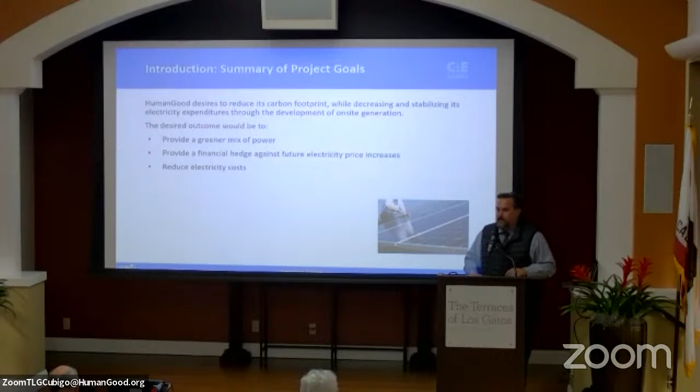So why did we do it? Very similar to what I said. We want to have a greener mix of our power. We want to create a financial hedge. So you read the newspaper, energy costs are going up constantly, right? PG&E, our local utility here, we are going to have a 23% increase in electricity next month. 23%. And it continues to go and it continues to go. So as we work with our clients and we talk about how do we reduce our costs, the only way to reduce your costs at this point is to build on-site energy and create your own, right? And even that, which we'll talk about in a little bit, they're trying to make that more difficult for us as well, right? And ultimately reduce electric costs.

I know that I'm going to talk a lot about money. We're going to talk a lot about technical stuff, but I don't want to lose sight of the environmental attributes that we get from the solar system. This is just the system going here. This is the equivalent of taking 214 cars off the road, right? And we're going to save money and they look cool, right? So I love the fact that we do this. I use this one when I talk at schools. It's 120 million cell phones charged. So you figure at a local high school, that's about 1 month's worth of their students charging their cell phones. It's crazy.

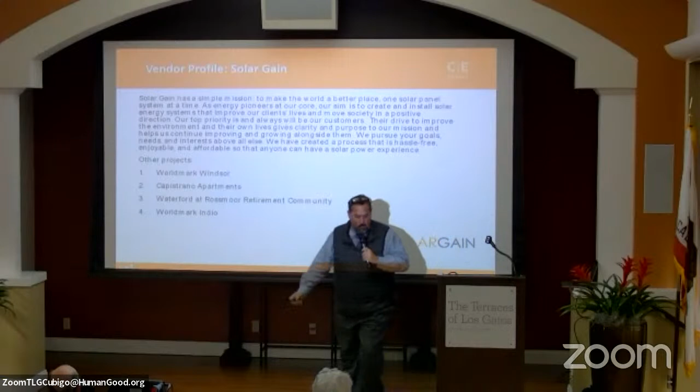I can't stand sitting behind one of these, so I'm going to move around. So how many of you have actually gotten to interact with any of the folks that are here working on site? Are they nice? Yeah. And this is just the initial crew, right? Just wait till they start banging on your roofs and waking you up at 5 o'clock in the morning because they want to get started working. Bradley didn't tell you that we approved 5 a.m. starts. Oh, sorry. Sorry, Bradley.

So, Solar Gain is a company that we've done business with for a long time. This project for Human Good was actually so big, I had to bring in 3 contractors to do it. So Solar Gain is doing the facility here. They're doing the facility in Los Altos.

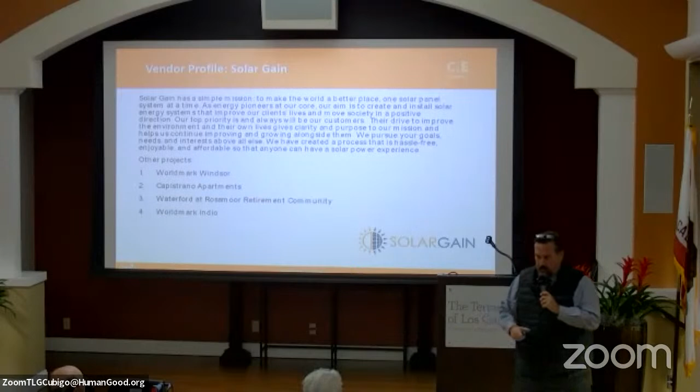They're doing a facility in Bakersfield for us. They're doing a facility in Fresno for us. And they are doing a facility in Oakland for us, right? So these guys have done a lot of projects for us. This is kind of one of the values of bringing us in to manage the process, is that we bring vendors in that we already know, right? We're not the vendor. We're the middle person where we help you guys figure that one out.

But these are some projects that they've done. So they did some work at Rossmoor. They did the Worldmark Windsor, which is a timeshare place up in Windsor, actually, go figure. So if you want to read their profile, this is for information about them.

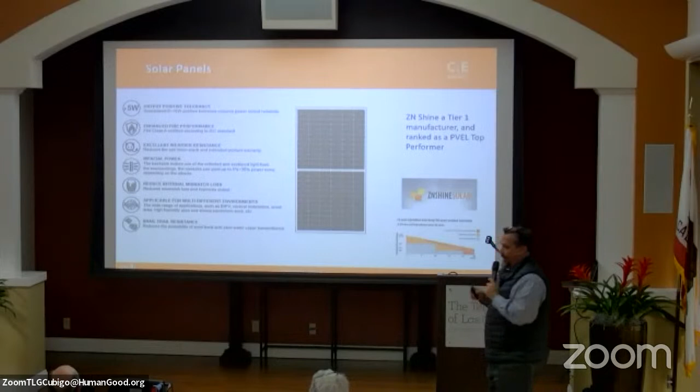I know you guys are all super, super interested in what solar panels we chose to put on the roof. So I will tell you guys a secret. In California, solar panels are relatively similar to the gasoline we get. The gasoline we get is already at such a high standard that even Rotten Robbie's gas is better than gas anywhere else in the country, right? Same thing with solar panels here. So we only use tier 1 solar panels.

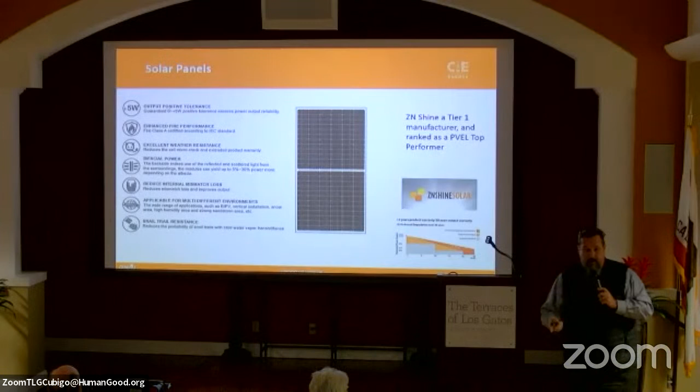In this instance, they used a panel called ZN Shine panel. It is a tier 1 panel, which is the highest grade panel you can have. One nice advantage of the ZN Shine panel is there's actually a 30-year warranty on these versus a 25-year warranty. Yes, ma'am. These particular panels, I believe, are made in Malaysia. Malaysia.

Yeah, so the push to American-made panels only happened literally a year ago yesterday, when the federal government decided to invest billions and billions of dollars to bring that back into the country. None of those are up and running yet, but yeah. But good question, where are they made?

So these are the panels going up. They're actually something called bifacial panels. So not only will we get the solar power that's coming in from the top, but these panels can actually pick up a little bit of the power that's reflecting from underneath. So as the irradiance bounces, it bounces back up and it gets it. It's a really cool selling feature for the guys who do that. And it literally increases our yield by like 3%. But it's really cool because we get power from the back as well. Yes, sir.

That's a great question. So I'll just repeat the question. So the question is, can you tell us a little bit about the reliability of the panel, time to failure? So I talked about a 30-year warranty. So let me tell you what that is, because it's actually a reliability warranty.

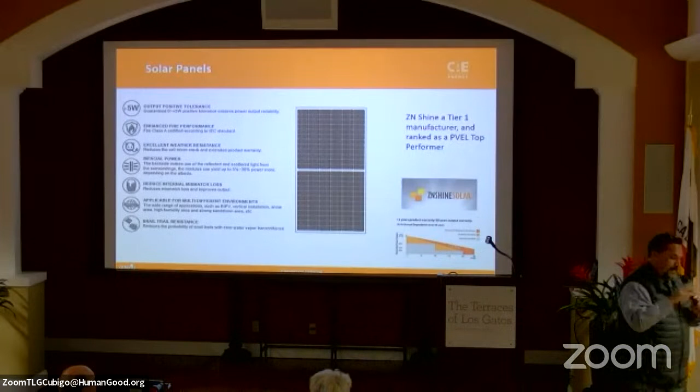So these panels are guaranteed to degrade no more than 0.5% per year. That means that at the end of the 30-year warranty, it doesn't actually equal out exactly to 15% because it's a half of the previous year. We're guaranteed to get about 90% of the production in year 30 that we're getting in year 1. Yeah, panels have gotten pretty amazing. The panels that are on my roof, I think that was like a 15-year warranty, right?

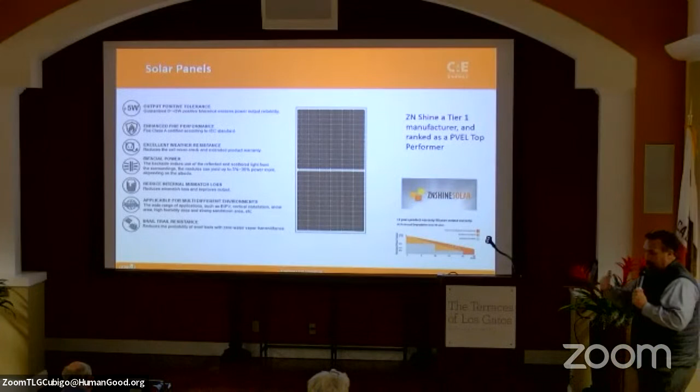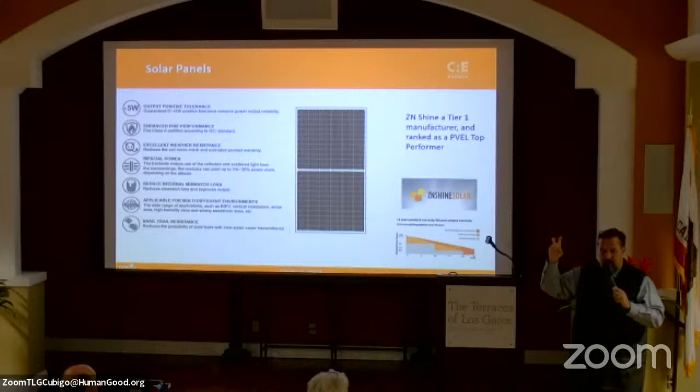They've also gotten incredibly more dense. So imagine one of these panels is about the size of a piece of plywood, right? So that's 4 feet by 8 feet. 10 years ago, when I put solar on my roof, I got 200 watt panels. So there's 200 watts per sheet of plywood. This is 540 watts per sheet of plywood. It's crazy how much more dense they've got. Any more questions about the panels themselves? About 4 feet by 8 feet.

Yes, ma'am. The question is, how do you clean them? So once every 6 months for arts and crafts, we are all going to go up on the roof.

So it's a good question. The panels actually very much need to be cleaned. So part of the arrangement that corporate has done is that once a year, we're going to have somebody come out, check all of the connections, make sure everything is still running properly. And twice a year, they're going to be cleaned. Yeah, it's actually amazing how much of an impact that makes when you clean the panels. It's about a 10% jump in the production on a dirty panel, right?

Any more questions about this? All right.

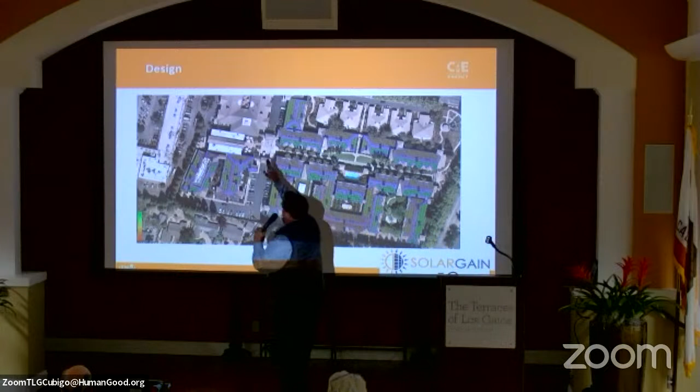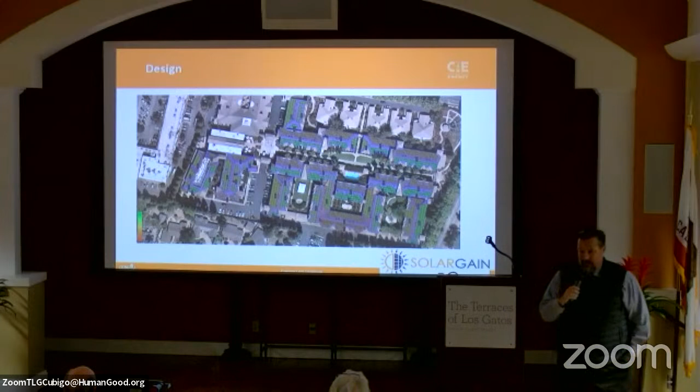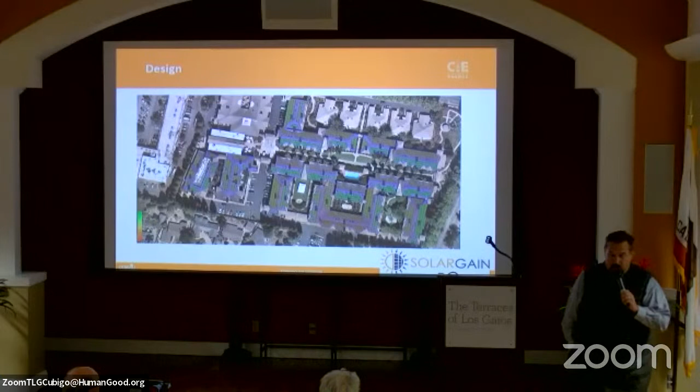All right. For a prize, who can tell me why we didn't touch that building? It starts with O, but you said it wrong. OSHPD, correct. Yes. So that building, so you guys know, is governed by all the same rules that hospitals are governed by. And it is a raging pain in the neck to deal with. And the amount of solar production that we could get from that building was not worth dealing with it.

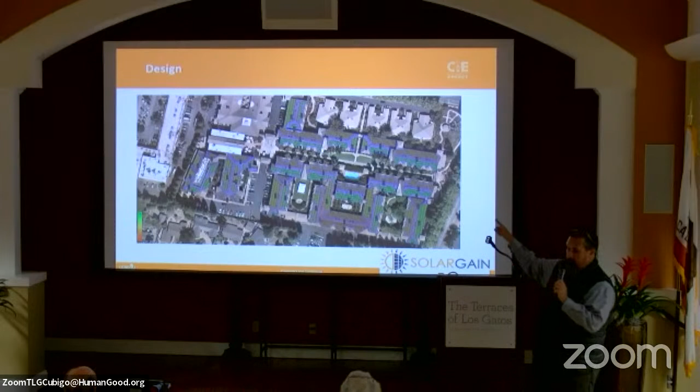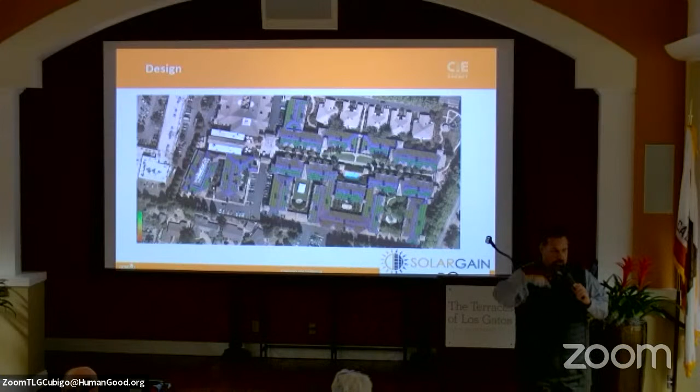So in the picture that was here before I put this one in, there was actually a big whited out area over that building because it was what I sent to the solar companies when we did the bids. I said, do not look at this building. We don't want you there. So, yes, sir.

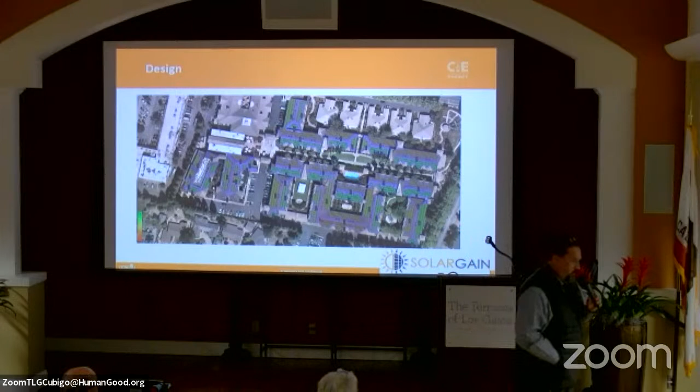So the question was, why wasn't the health center eligible? The health center is absolutely eligible for solar. It is the amount of work and the amount of bureaucracy that we have to go through in order to put solar on that building would have made it difficult to make the entire project pay out because it's hospital related. Yeah. And anytime you mention OSHPD to a building engineer, they freak out and don't want to deal with it unless they absolutely have to.

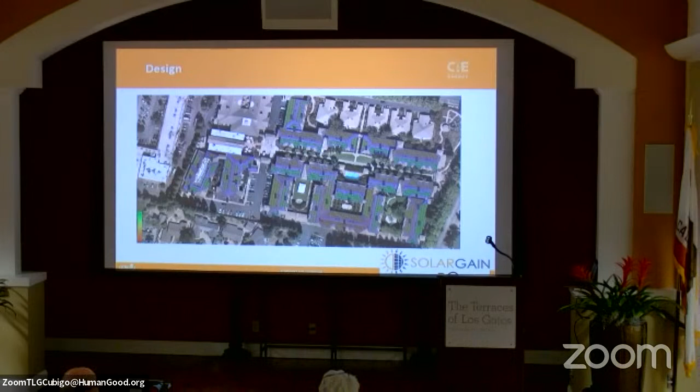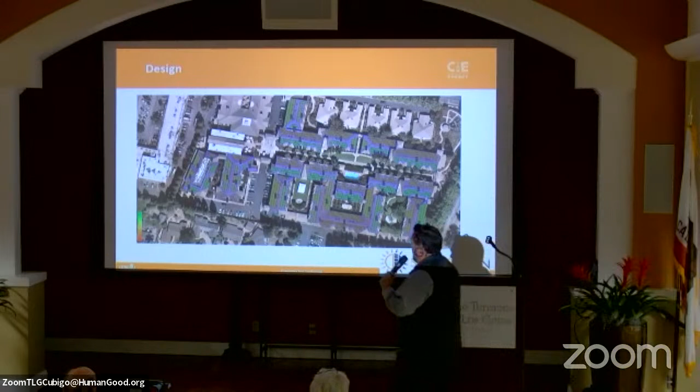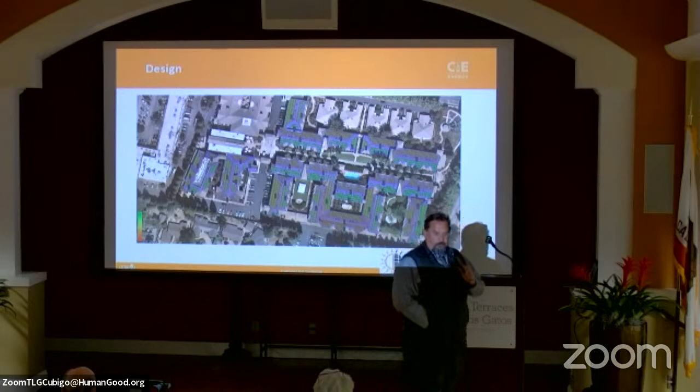Is that the ones in the back there? Yeah. The question was, how about the patio homes? So because of the way the roofs are shaped up there, we have to have a 4-foot fire gap around all of the edges. And so we'd literally be able to put like 2 panels on each one of those. And those patio homes are actually fed by the same electric meter as these buildings. So those patio homes will be getting their electricity covered by the solar system. There's just not solar on top of them. Did that answer your question, ma'am?

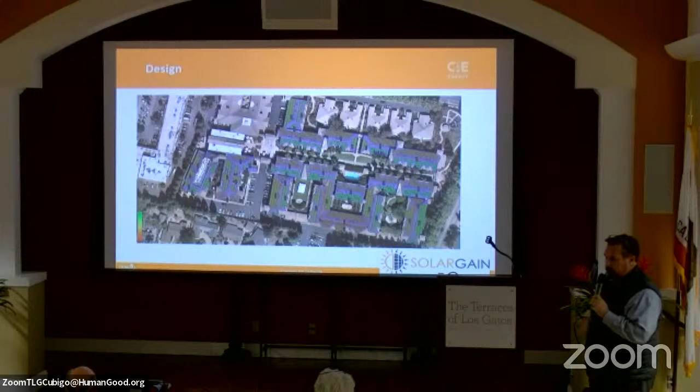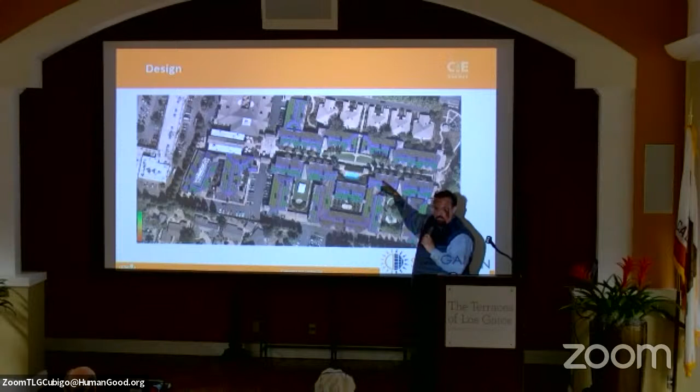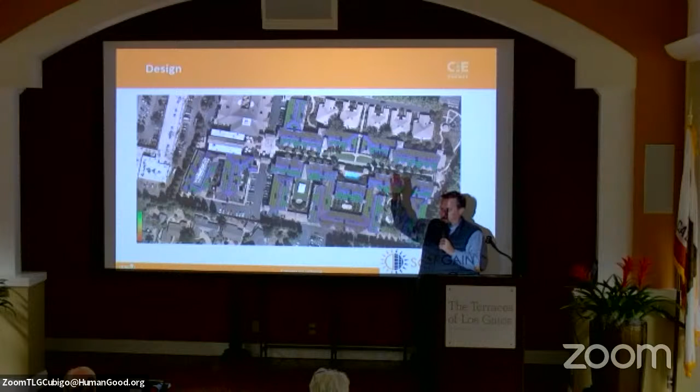So the bright green ones produce the most power based on their orientation to the sun and based on any shading that happens. Yeah. Basically green best, red worst. So if you notice, the darker ones are on the north side of the building. That's because the north side of the building doesn't get as much sun as the south side. Right? In the middle of summer, when the sun's straight up and down, it's not a big deal. But as we get into the middle of winter and the sun is at a deeper angle, we just don't get as much production.

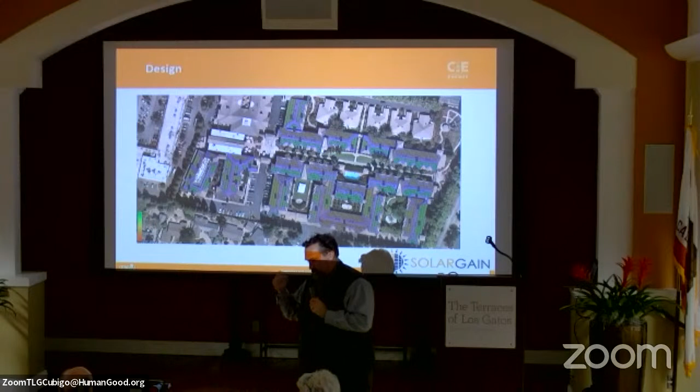What percentage is the bad panels versus the not-as-good orientation versus the good orientation? I'm just a finance guy. Sorry, I don't know the answer to your question.

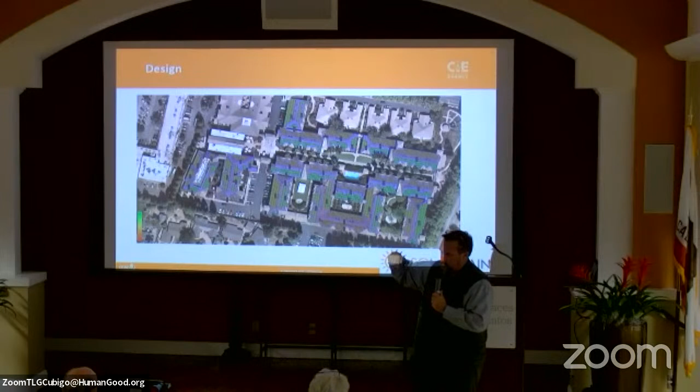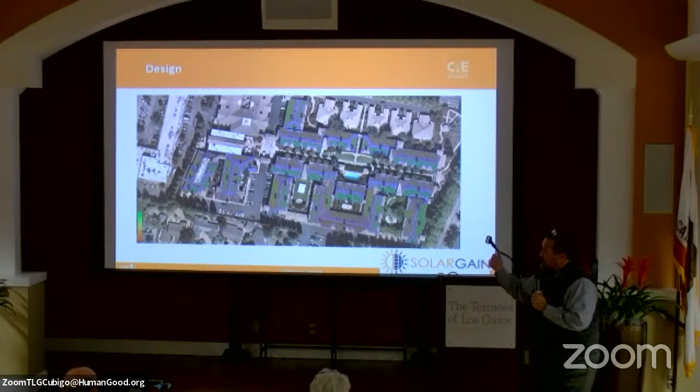On average, we're at about 1,550 kilowatts, which is like if we had a flat roof, we'd be at about 1,550. So the ones facing this way are that much better than a flat roof, and the ones facing that way are that much worse than a flat roof, and they about average out. But ultimately, if you look at it, that's a lot of dark colors up there, right? And if we took that dark color out, we'd be cutting the amount of electricity that we can produce significantly, right?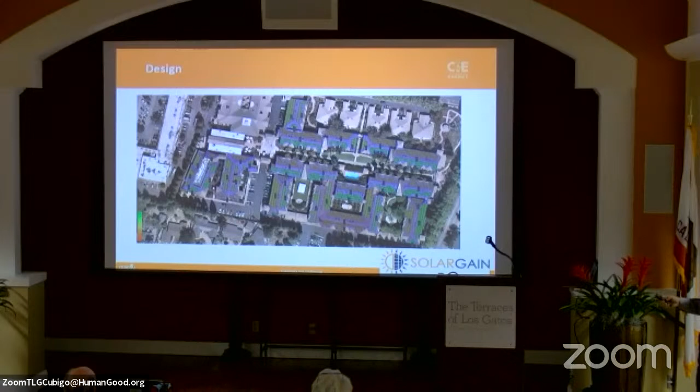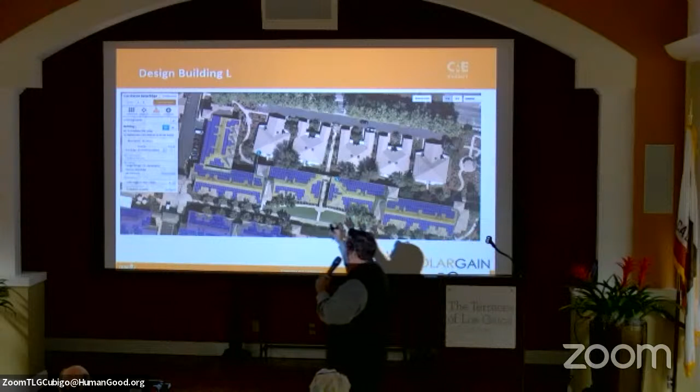So let's talk about specific buildings. I know this is really important for you guys to see the angle and the routing that we're going to do for the wiring. But I put this in here just in case anyone wanted to talk about this. So this is a more detailed view of building L. Building L in and of itself is going to get 240 kilowatts on top of it. That 240 kilowatts is going to produce, call it 400,000 kilowatt hours a year, just that one. So that's about 40 homes here in the valley that run their air conditioning.

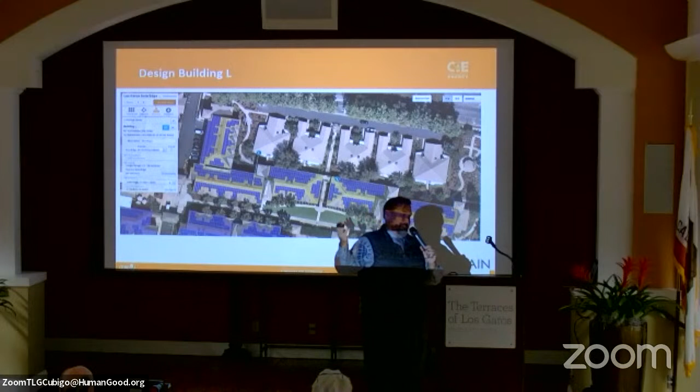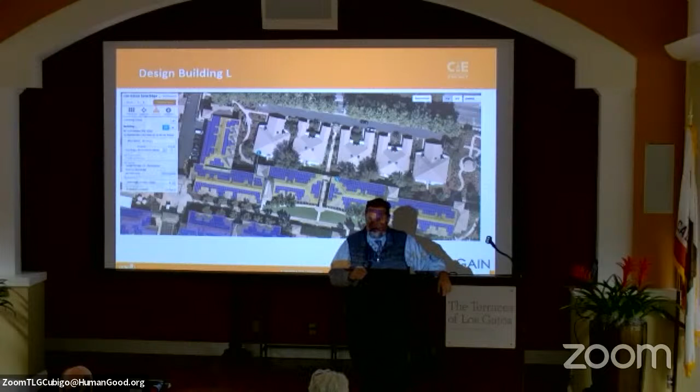My understanding is this whole thing here is building L. Is it okay? I'm in trouble now. Hey guys, I'm just the finance guy. I don't know. So just for clarification, for the sake of the project, what we're calling Building L is basically all of the buildings on the left-hand side of the Esplanade, all of the 5 buildings there. Is there not a building L? There is. It's one of the 5 that are there. Okay. So most likely, because I did not name these, the electric meter itself is in building L, and that's why we call it building L. I just assumed they were all building L, right?

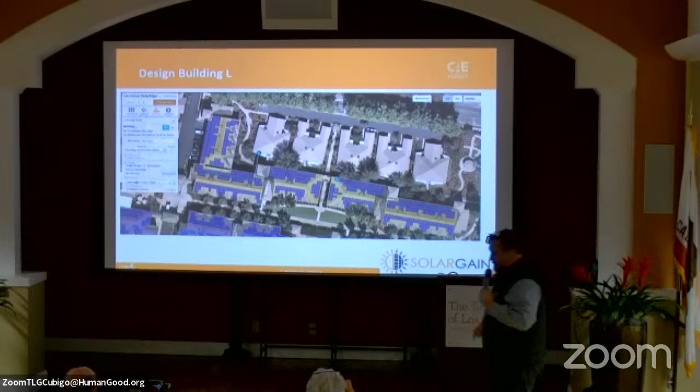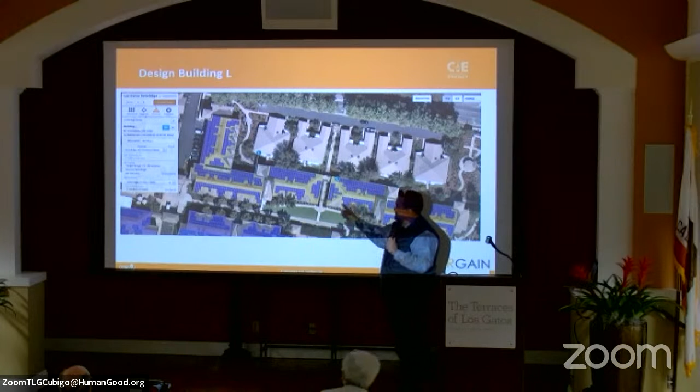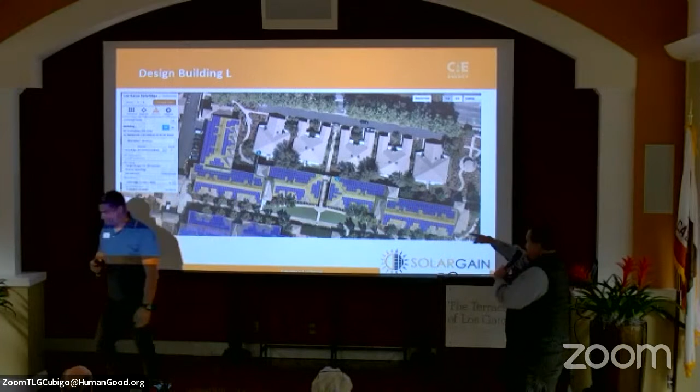So which one's L? This one? Yes. Okay. This one. So we have building E, building D. There's an electrical room here, and it carries down to L, electrical room down here. So all of this is L. I have no idea why they call it building L. It's just split between the walkways. But everything you see up there zoomed in is a single solar system that runs together into one electrical room.

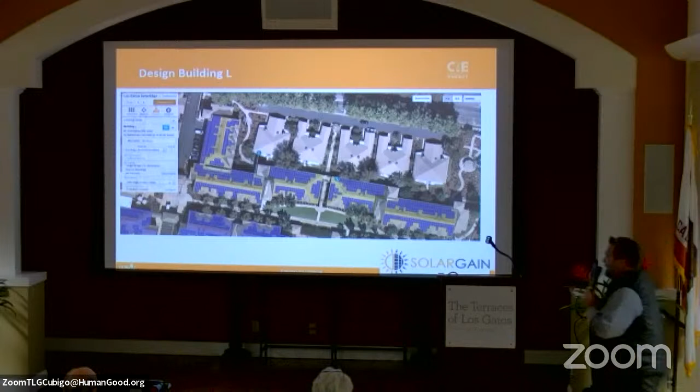The question is, are the spaces there for the skylights? The spaces that we see, actually I don't see any skylights. The spaces that are there are that 4-foot gap that we need, like from the dormers. It also looks like there's some venting up there. If there were skylights, there would be a 4-foot gap around the skylights as well. Yeah. As I see it, I'm going to bet in this picture that those are skylights. I've never actually been on your roof, right? But the guy that designed this was. So going around the skylights.

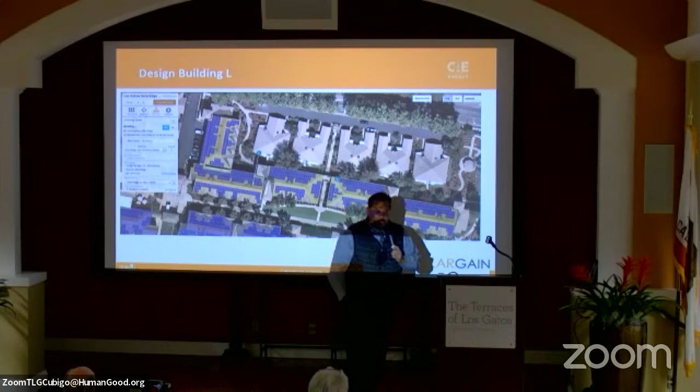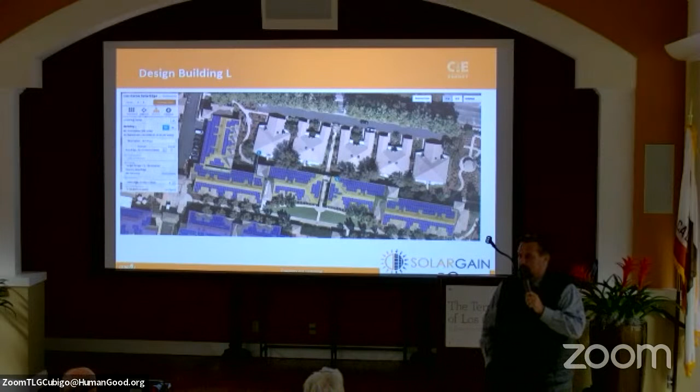Vincent, am I covering up any skylights? Doesn't look like it. Nope. Yeah. And if I am, it's Vincent's fault.

No. Guys, there's no way that we would cover up skylights. It's just not something that's done. So I'm assuming this is not building Q, but this is all of the interconnections that are going into building Q. So this is a lot of stuff going in. This one is also 240 kilowatts. This is also about 400,000 kilowatt hours, or the equivalent of 40 homes.

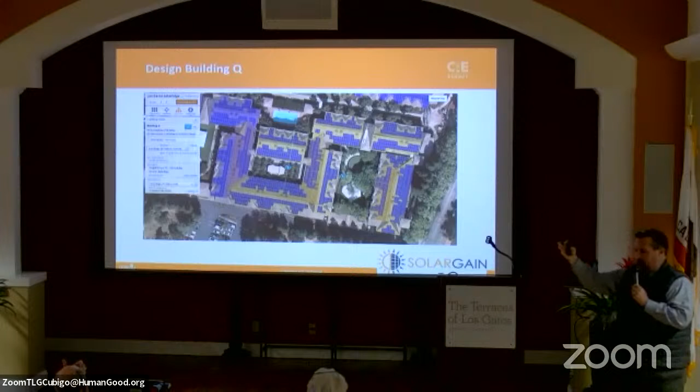Correct. There's a third one. Correct. We'll get there. Next page. Oh, I'm sorry. The question was, the announcement said there was 960 or so kilowatts. You showed me 240 and 240. Where's the rest? And my answer was on the next page. Here's the next page.

Okay. I see solar on the whole roof. We asked them to cover your spot. Why did I ask that? Yes. Sorry. We found out you were mining Bitcoin in there. So we're like, no, you're out.

All right. So back to this gentleman's question: 240 and 240 adds up to 480, and we said 960. As I got closer here, because my glasses are on my forehead, I realized that the number I was giving you was an AC number. Don't ask. There's a DC number up here, which is 333 kilowatts. So that is what's adding up to your number. I was looking at the wrong number. The systems are actually not producing 400,000 kilowatt hours. They're producing about 500,000 kilowatt hours a pop, right? That conversion I was doing, the 1550 times that number, is actually on the DC rating.

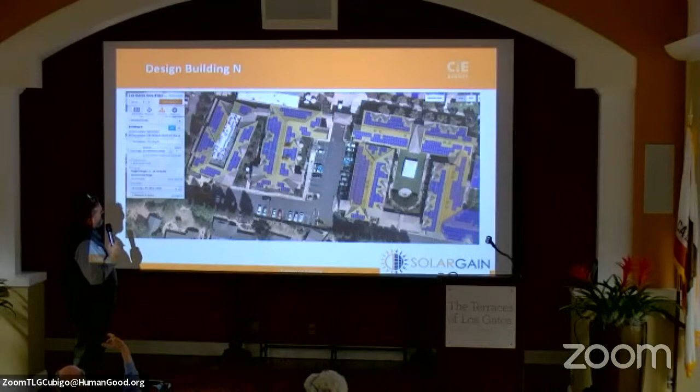Did I lose it? Which is what we give to PG&E, and it's more impacting on the electrical equipment here in the facility. So, yes, sir. Yes. I would, yes, the sun, okay, so it may be on the roof, it may be on the downs. I actually would have to pull up the single line drawings to look at it.

So the good question. Sorry, the question is, where on the drawing does it go from DC to AC? Right, and so they go from DC to AC through something called inverters, right? That are basically, I don't know why we don't call them converters. They're basically converting the power from DC to AC, right? It's almost like going through a transformer. And typically, those are on the down lines.

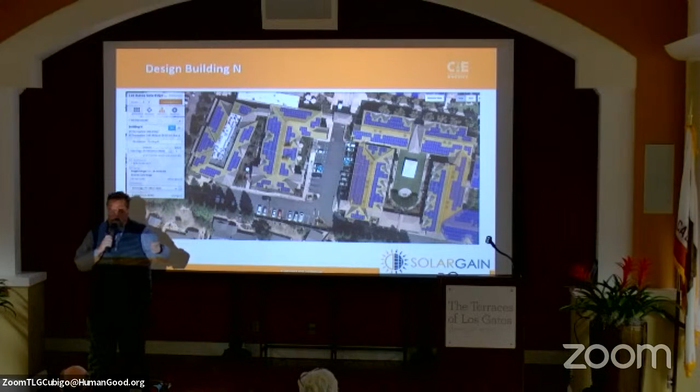So I will get that answer to Vincent, and we'll make sure we get it out where they're going. Yeah, actually, they'll be going into the electrical rooms. They're going into the electrical rooms. So what that means, all right, that answers all of my questions. So that means all of the wiring on the roof is DC. And then it goes down to the electrical rooms in DC. And then in the electrical room itself, it's converted from DC to AC.

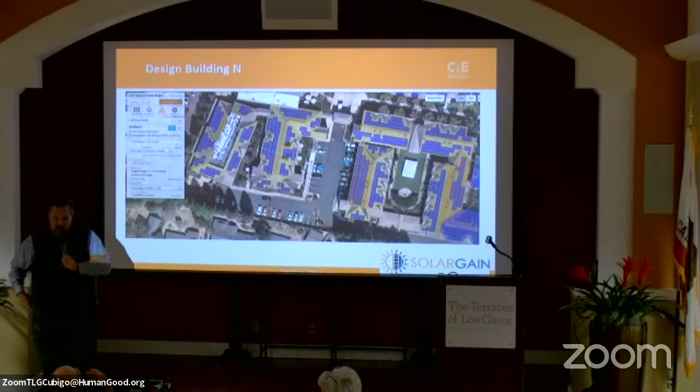All right, you're coming to work for me.

So the question is, I'll get to you, sir. The question is, that's a little bit different than how it's in the home. The answer is yes. So there's three different ways that it's done for the installation in the conversion from DC to AC. So at homes, we use something called micro inverters. It's actually an East Bay company, Enphase, that most of the folks use, that every single panel has its own inverter attached to it. And so all of the wiring that's running around on the roof, everything that goes down into the electrical rooms is already AC power.

The reason that that's used, nerdy stuff, it has to do with shading, and it has to do with like when one thing gets shaded, how it impacts the rest of the things connected to the same inverter. And so on residential roofs where they tend to have panels looking in multiple different directions, they want to make sure that we get the maximum production out of it.

There's also something called string inverters, which is where you've got, like in something like this, you've got 5 of them up there that are converting up on the rooftop, and then it goes down. And then in this instance, it's a centralized inverter, which is one inverter that does all of it. So yeah, there's 3 different ways to do it. Yes, sir.

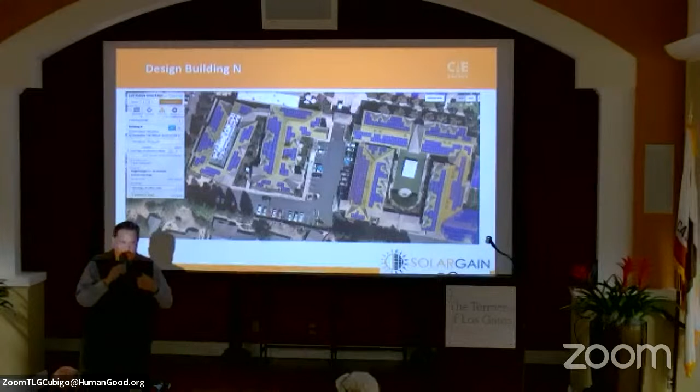Same situation, the building needs 1,000, and it's 2 o'clock in the afternoon on a cool July day, and the solar system is producing 1,200 units. In that instance, 1,000 of the units would come here into the building, and the building would say, "Oh, I'm full, go away." And those remaining 200 would go back to PG&E, and they'd literally spin the meter backwards.

So like, if you ever sat there and watched your electric meter, which I unfortunately have, it's constantly ticking up. It'll actually tick backwards during that time.

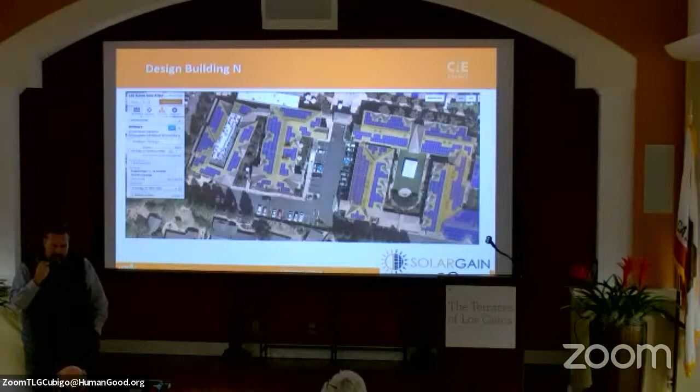Yes, sir. Battery backup on site, battery storage on site, and that's question 1. Question 2 is night, supplying all of our power, because we aren't generating. And three, what percent of our total power will be supplied by the solar? Okay, real quick. Did I answer your question, sir?

Okay, so question one, because I'm going to repeat these one at a time. Question one was, are there batteries associated with the system for storage? The answer is no. So up until April 14th of this year, batteries were not needed. On the financial side of things, batteries were not needed.

Anything outside of your home where you have a Tesla charger there that will continue to run your refrigerator for like 2 days, a battery here would last 10 minutes. Any battery that makes financial sense here would maybe last an hour, right? But it just financially does not make sense. So the only reason that you do it has to do with what I was talking about with this gentleman's answer here of when I'm spinning my meter backwards, right?

So prior to April 14th, if I'm spinning my meter backwards, the utility is paying me full retail for what I'm giving it. So it makes no difference whether it's spinning forward or backwards, it's the same amount. And then later on in the evening, when the sun's not shining and now I'm pulling from the utility, I am basically paying for that power at retail when I gave it to it earlier at retail. So it's kind of a wash. So because of that, I don't need a battery in the system here. And because the batteries don't make sense for backup, we decided not to do it.

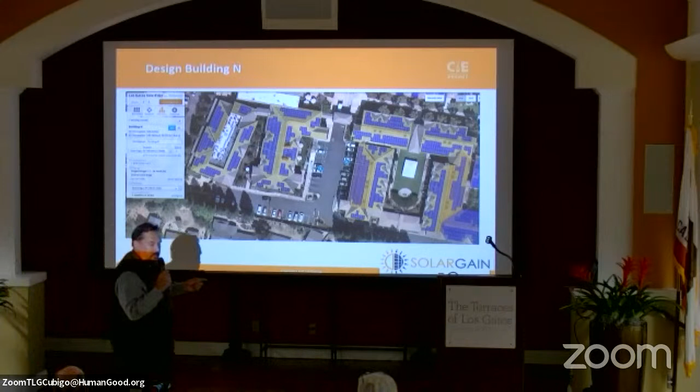Second question is what happens at night? So at night, we're purchasing the electricity from the utility, right? So although we will have an overall offset that we do for the year, there are going to be times in the middle of the day where you're covering 100% of your electricity with the solar system. And every night in the middle of the night, you're covering 0% of your electricity with the solar system.

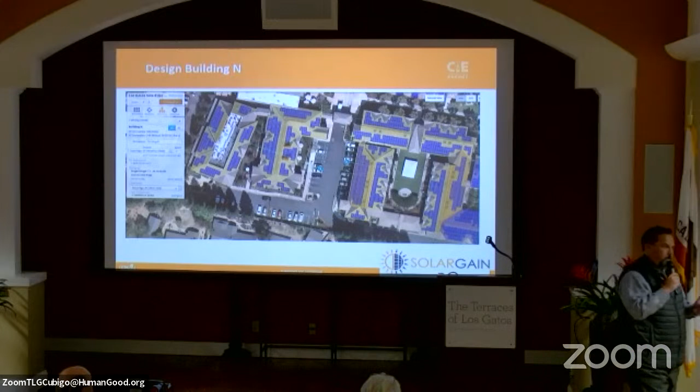So in essence, the utility operates as our battery for now, where we give our excess power to them. And then when we need it, we get it from them. The good news is that there is very little or no loss in that transaction, where if it was a battery, we'd actually lose 14% of it. Just the round trip efficiency of a battery, we lose 14%. I think I covered all three of your questions. If I didn't, remind me of the third one.

The sum of it is that we buy at retail, sell back at retail because the meters spin backwards. The comment was the sum of it is we buy at retail and sell back at retail because the meter spins backwards. And the answer is yes. Yes, sir. The question was, did I answer the part about backup? Yes, there is no backup with this system.

So solar systems anywhere, on 95% of the homes, the homes that don't have Tesla batteries, when the utility goes down, the solar system goes down with it. So if the power was out here, nerdy stuff, but remember those inverters I told you guys about that convert the DC power to AC? Instead of converting DC power to AC, they would be converting the DC power to heat, and they'd be giving off a little bit of heat. So that electricity generated from the solar systems would just go nowhere.

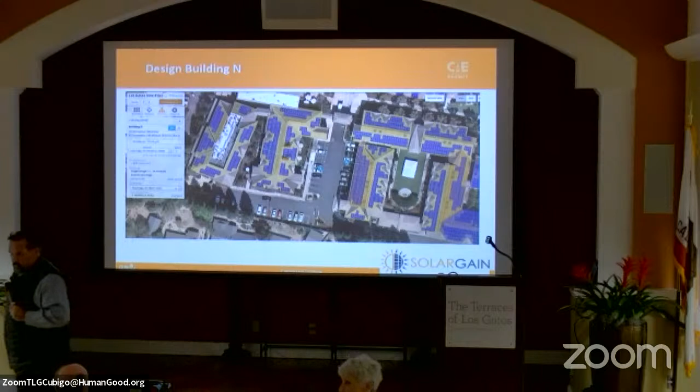Yes, ma'am. The question is whether we as residents can improve the economics of this by using our washer and dryer at different hours of the day, as was the case with our own residences. That is a great question.

You're going to come work for me too.

The answer is, oh, I'm sorry. Dang it.

So the question was, is there anything that we can do as residents to help impact the economics of this solar system and make it better, in terms of when we use our energy and how we use our energy, like we did in our residences? So it's actually a two-part answer. In terms of impacting the economics of the solar system, the answer is no, right? In terms of impacting the underlying cost that is being impacted by the solar system, the answer is absolutely, right? So at home, at residence, here, everywhere.

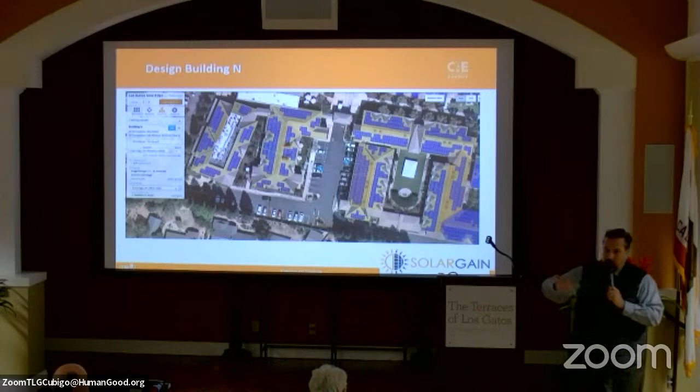Now, by the way, businesses are faced with this. The most expensive power is between 4 p.m. and 9 p.m. every day. I mean, at 2 o'clock today, a megawatt hour of power was $1.50. Forget what a megawatt of power is, but a megawatt of power was $1.50. At 8 o'clock tonight, it'll be $1,200. Right? And so that averages out for you. On average, we pay about $40 a megawatt hour. But in the middle of the day, it is considerably cheaper than 4 to 9.

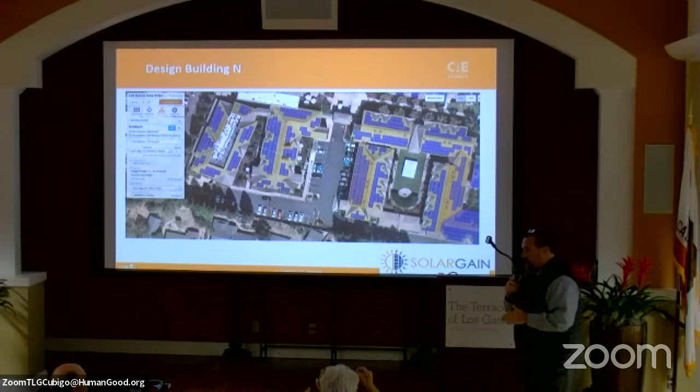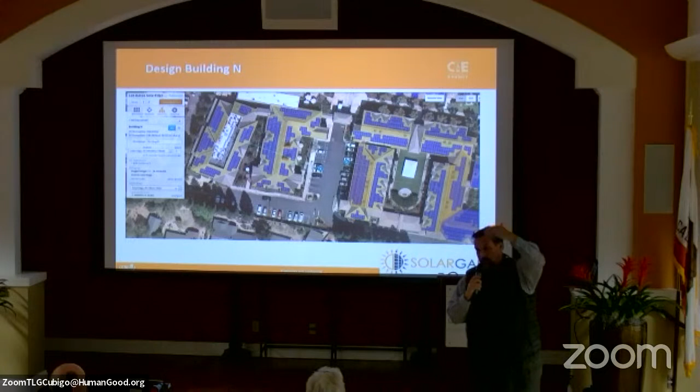So the answer to your question is if you can do things outside of a time frame to help the overall community with the underlying cost, which will ultimately be benefited by the solar system, stay out of 4 to 9. And here, it's not a residential meter, it's a commercial meter, but commercial meters now have the same time inputs, the same value of the energy. Correct.

His comment was the deal is wash your clothes during the sunshine. I am not telling you to do anything about when you wash your clothes. I'm not telling you not to run your air conditioning. The question was, what can we do? And I am answering, what can you do?

Yes, ma'am. Okay, I want to ask about safety. We have lots of rats and squirrels, and they like to chew on wires and everything. Is there any chance of an explosion or fire on that roof? So the question was, we have a lot of critters around here that like to chew on wires. Is there any chance of explosion or fire? Explosion, never, right? These things don't explode. The chance of fire is probably no higher than the chance of this thing catching on fire. Does it happen? Yeah, it does, right? There are electrical fires all the time.

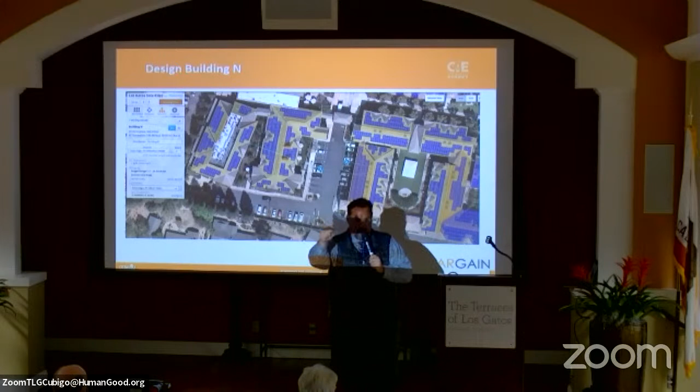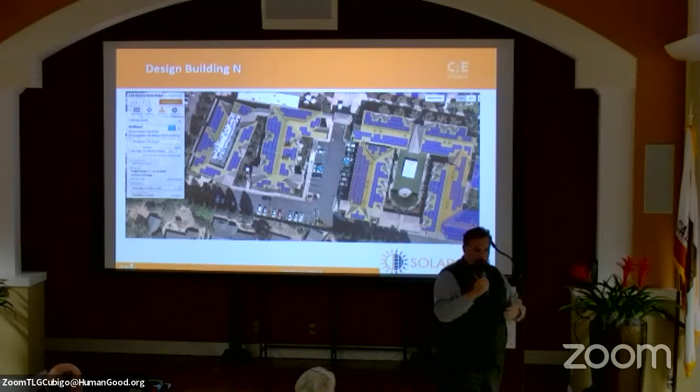What's in place in this that helps protect from that? So at every egress onto the rooftop, there are breakers to turn them off, right? So that the firemen can turn them off if they come up. There are protective relays on all of these, similar to like a GFCI switch that you have in your kitchens, right? To make sure if they touch water that you're protected. The solar industry is heavily regulated by not only the planning departments in the cities, but this also has to go through fire planning and everything else to make sure that we're mitigating those risks as much as possible. So can I tell you it's never going to happen? No, right? I also can't tell you that we're never going to get struck by lightning. Did I answer your question, ma'am? Thank you. Yes, sir.

Two-thirds of the plans have been approved by the city, and we're waiting for the one last set of plans to be approved. They are actually just doing safety things up there right now. They're, as my CEO likes to say, fixing to get ready to do something. Yes, sir.

The question was, when do I think the project's going to get? See, I didn't even have to do a presentation. They got all these questions they're going to ask me. And so I'm just going to get to them and I'm going to be like, skip.

The question, when do we think the project will be complete and we'll actually be getting power from the solar system? Internally, I'm forecasting to HumanGood leadership that it'll be done first quarter of 2024. I would very much like to see it done in Q4. So we have an insurance thing that came up that we're having to run all of our plans through a separate underwriting process. Remember I was telling you guys about OSHPD? Well, basically OSHPD from an insurance company jumped in and said they want to look at everything. So it might be delayed. Yes, sir.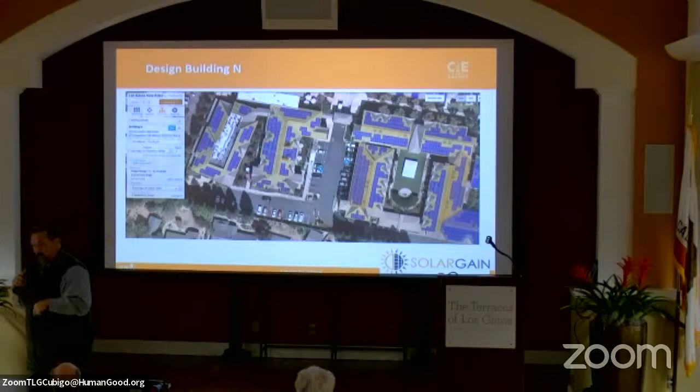So we will get sign off by the city of Los Gatos. We'll get sign off by the fire department of Los Gatos. And then ultimately PG&E will say, okay, it's okay to turn this on. And at that point, we'll turn it on. And those 3 will be separate.

So your answer is starting at first quarter 24. Does that mean a building or everything? So I'm a total sandbagger, and you will never be able to nail me down to a number that I'm not 100% confident is going to happen.

So they'll all start. Oh, I'm sorry. The question was, is the first quarter of 24 start for all buildings or one of the buildings? My commitment is that they will all be on by first quarter of 24, and hopefully they'll be on sooner than that. Yes, ma'am.

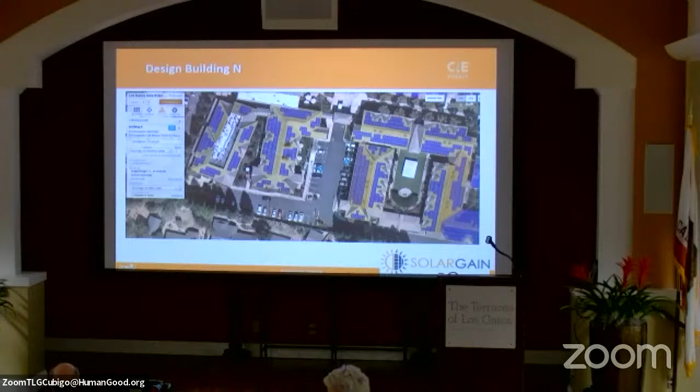All right. So let's play a game. Oh, God dang it. I'm thinking in my head, how do I answer this question? So the question is, how fast will we financially recover the money from this system? Okay. So we won't play a game. It's just under 5 years. Just under 5 years. Yeah.

Which is actually great considering what we're doing, where we're doing it. There's some changes that happened at the federal government level with the Inflation Reduction Act that allowed us to take advantage of some tax credits that we didn't used to be able to take advantage of, which are helping accelerate that. Just shy of 5 years. Correct. Yes, sir. Consider this as a capital investment.

I'm going to have to hand that one over to Bradley. I don't know what the individual structure is here. The question was, do we consider this a capital project here in the community and what are the conditions? I honestly don't know the answer specific to this community, but I will let Bradley answer that. Yes, it is considered a capital project, which means all the costs associated with installing the system are covered through the HumanGood capital budget and not the Terraces of Los Gatos operating budget.

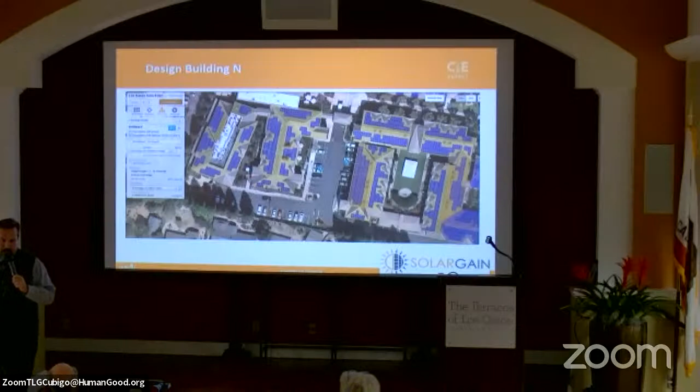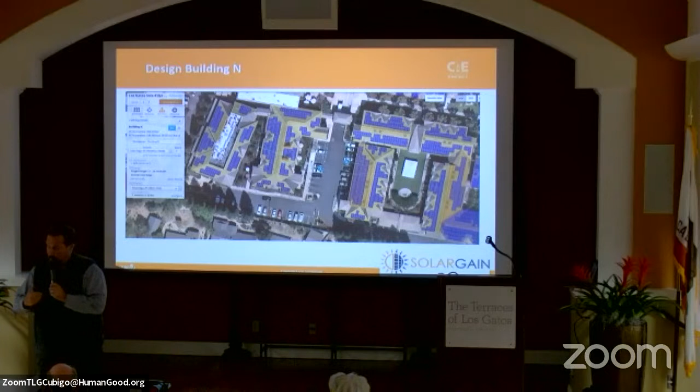Nope, Vincent. Yeah, but realize that, you asked, who do we call if the power's out? If the power's out here, it's probably not the solar system.

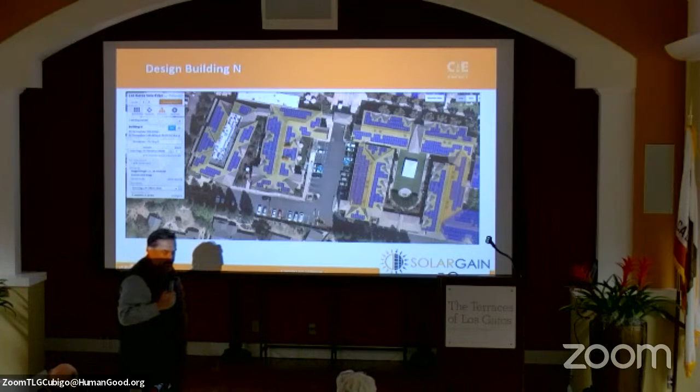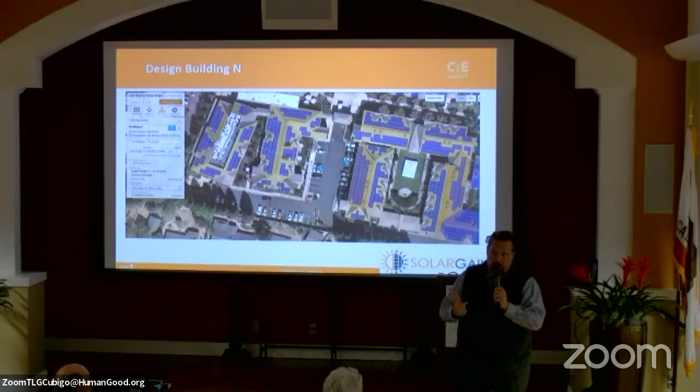Yes, sir. So if a panel breaks, do they just replace it? Or is there a deductible involved? So the question was, if a panel breaks, do we just replace it? Is there a deductible involved? The answer is no, there's no deductible involved. It's just replaced. And the cool thing that has happened in the last 6 or 7 years with solar panels is they've become very cookie cutter.

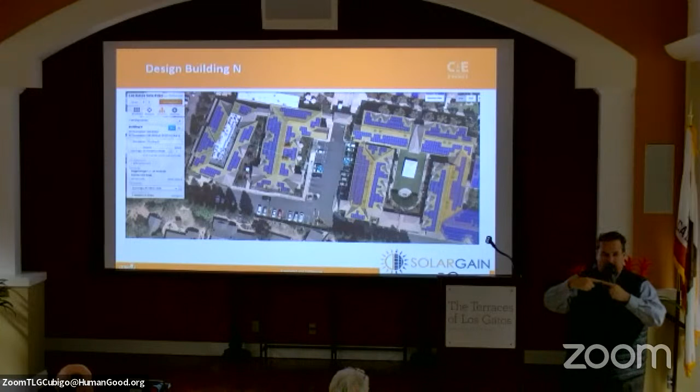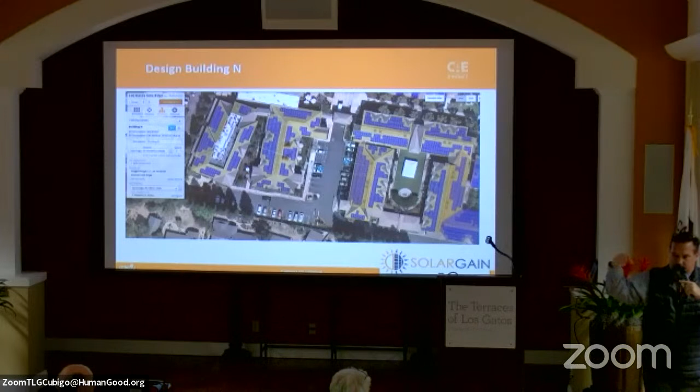So every one of these panels has 2 whips, like 2 electrical plugs, coming out the bottom of it. One goes to the panel in front of it. One goes to the panel behind it. They're literally like plug connectors. And so if a panel needs to be replaced, you unscrew 4 screws that hold it down, pull it out, disconnect the whips on both sides, connect the new whips, and put the panel back down. Yes, sir.

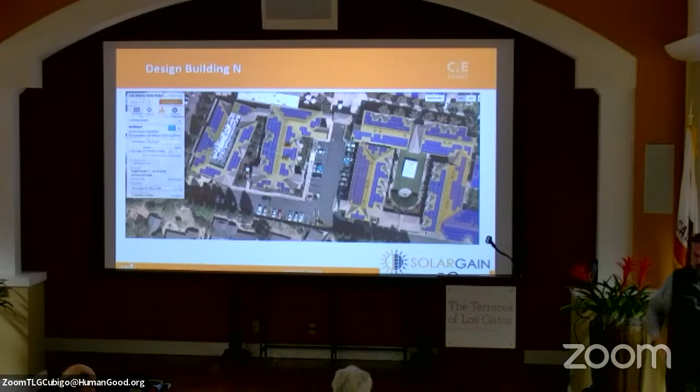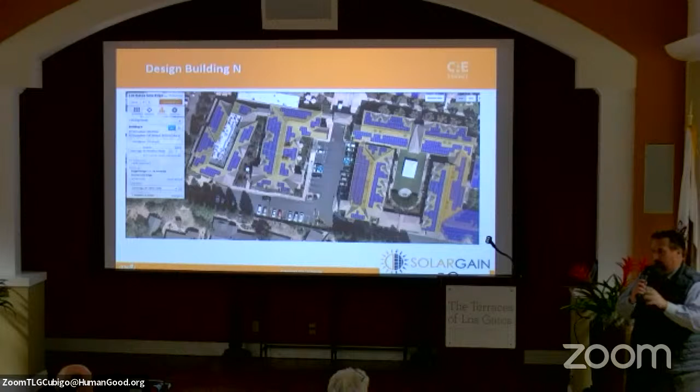Some of the home systems, if a panel fails, it's set up so that it avoids it. I think these are in series, right? The system doesn't go down, because they have some way to skirt around the failure. Correct. They're actually in parallel, but yes. The question was, if a single panel goes down, does it take an entire system down? And the answer is no. They're wired to bypass that.

We will take 2 more short questions. Come on, this is fun. Or 1 more longer question, and then we got to wrap. Yes, ma'am.

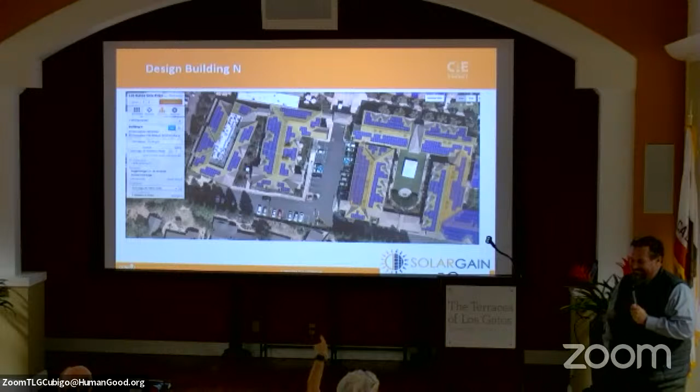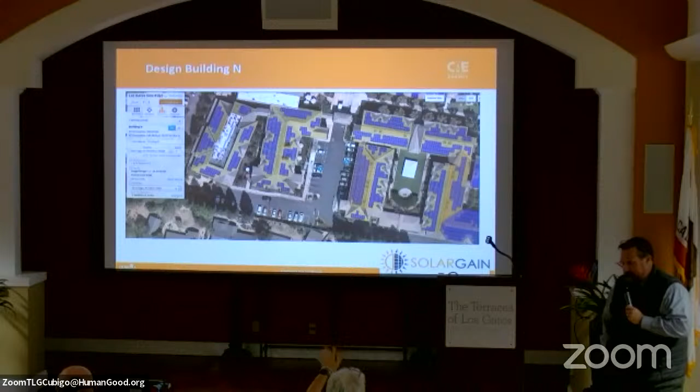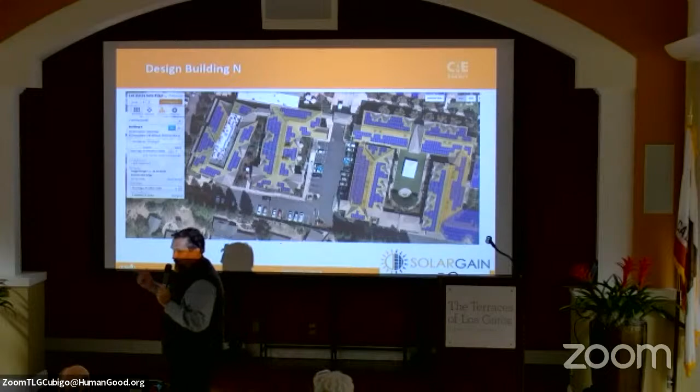I have 2 questions. One of them is where the health center is, our dining room is below that. The kitchen, gas, electricity, and dishwashers, are we benefiting at all? Because that can't be covered. So the question is, the kitchen and dining room are over near the health center. Are they benefiting at all? And the answer is no. There is no connection to that.

And the second question was, so unplugging my television set in the middle of the night isn't gonna make any difference? Because I heard that was one of the suggestions. What can I do to lessen my usage. And somebody said, unplug your computer, your television, whatever you're not using. So the question was, does unplugging my television set at the end of the night help? Every little bit makes a difference if it adds up.

Now, my home, where I've got 4 people there, we've got air conditioner, everything else, in the middle of the night, we're drawing 0.5 kilowatt hour of power every hour. And we don't unplug anything, right? And we use about 10,000, 11,000 kilowatt hours a year. So would the impact be there? Of course it would. Would anyone be able to notice? No. If all of you unplugged everything all night, every night, we would never notice.

Now, it would be a great opportunity to reach out to your grandkids to help you reset the clock on the VCR. Come on, I had to throw that one in. That was funny. That was funny. All right.

I'm okay running over. Are you not? Yeah, we got to wrap. Okay, yeah, let me run through this stuff really quick.